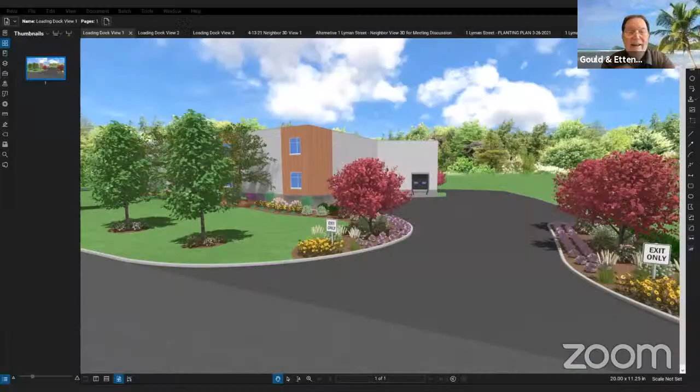I will now confirm members' access, and if you can just say yay when I call out your name. Diana? Yay. Dave? Yay. Lisa? Yay. And Tom? Yay. And my name is Michelle. I'm the chair. So we will begin the meeting, and we'll start by inviting in the applicant, and today's meeting is only about one item. So we start with, we have Jeff, Alok, Vito. And will Marshall be joining you? Here I am. Oh, and there you are, Marshall. Yep. Okay. So at the last meeting, we had 2 items to discuss.

I'm recusing myself from the board. Okay, yeah, please make a note that Dave is recusing himself from the board and will be joining the team to discuss the landscaping. So what we're going to do is start with the loading dock because we had several questions about that. Let's start talking about that, and then we can segue over to the final discussion on the landscaping. And then unless noted otherwise, we should be able to wrap this up. Okay. Who wants to talk? Is it Vito or Alok or Marshall or Jeff? Want to start with the loading dock?

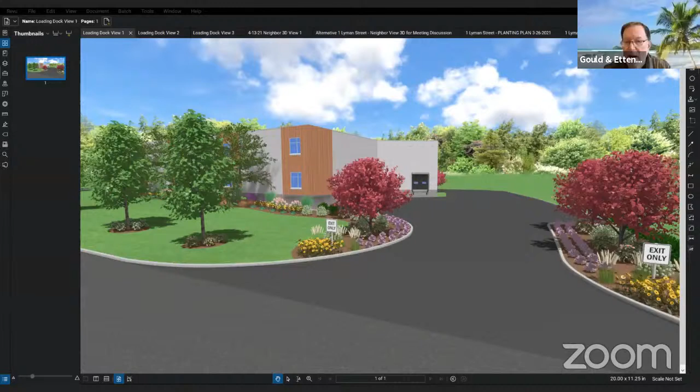Alok, are you going to do this? You're muted. I think he's frozen. I'm trying to unmute. I seem to be having some little difficulties here. Can you hear me? Yes. Yep.

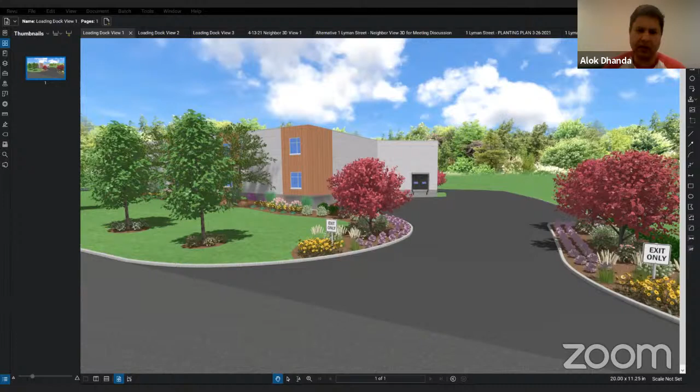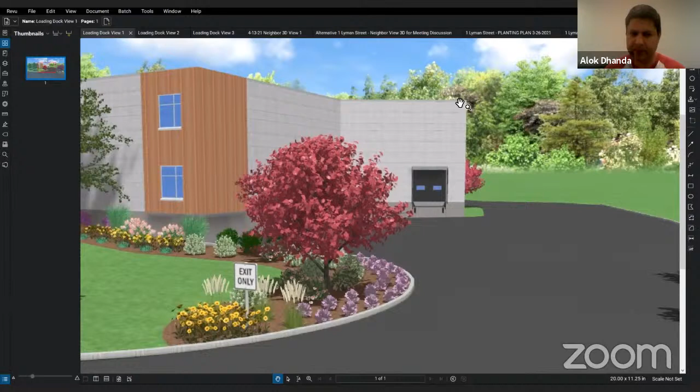It seems like this is really the only facade along which the foundation will be visible. We have plantings along virtually the entire perimeter along the 2 sides and the front. And so this at the back of the building is where we would experience the foundation. I noticed this plenty in institutional buildings and residential buildings, and it seems overkill to clad it in my opinion, but that's kind of where the rendering stands from an architectural standpoint. Okay.

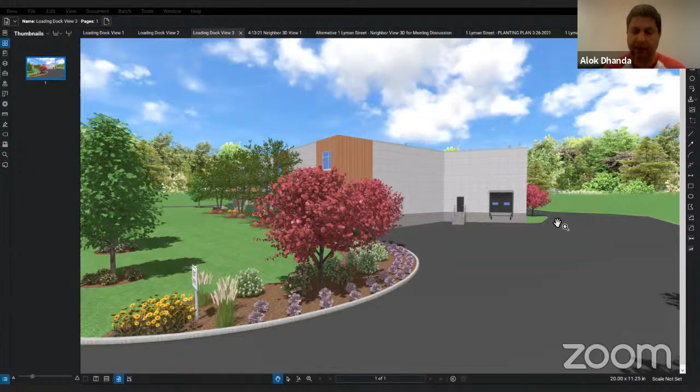My only comment would be maybe consider having the doors be the same color as the split face block or close approximation so it doesn't pop out at you. But it's relatively modest in its scale compared to the rest of the building. Yeah, I would agree. I don't think we'd have any issue with blending the doors. I think that's certainly doable. I agree the color change makes sense. I do too. That's a good comment, Tom.

So I find that perfectly acceptable. It's such a modest detail on the scale of the building. It's not intrusive. It's actually kind of minimal compared to the rest of the buildings in the industrial district, and it's certainly residential in scale and type. So I'd rather focus on the landscaping.

Okay. And do any other board members have any other comments about this rendering? How about you, Lisa? Any comments? Are you in favor of it? Yeah, I think the door comment is correct. I would definitely put the garage door to blend with the wall and the man door. Yep. Okay. Nice job. Looks good.

Okay, so thank you on this. This takes care of the loading dock area. If you can make that change, it's appropriate. If we're all set with this area of the building, let's go over to landscape and start discussing the landscape, which is the final outstanding issue.

Now, I don't know if you want to do this, Marshall or Jeff, but Jeff, you had either a call or a discussion with the abutting neighbor Ann, and then Marshall, yourself as well. And just to let the committee know that Ann was delayed in getting back because she had a family member that is very ill that she's been taking care of, but she was able to respond, which I think Marshall and Jeff can walk you through because basically they've been working with Ann on this.

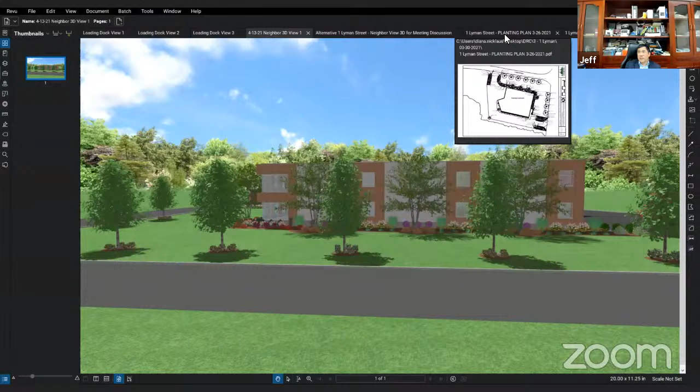Let me start with my conversation with Ann. So basically, I sent a few emails to Ann. The first email basically asked her to set up a meeting with me or David to discuss their landscape needs. And she did not respond to my first email, but then I followed up with a second email. Then she did respond to the second email, and her words indicate that she preferred to have more trees, more greens around Lyman Street.

And then I also sent the third email asking her if her family can consider letting us plant some trees on her property according to a design acceptable to both parties. And she respectfully declined the offer. And so that's all the communications I have with Ann. Okay. And Marshall, did you want to give feedback?

I also sent Ann an email saying, obviously, sorry about her family situation, because my wife and I have been through that within the last year as well. But I did not hear back from Ann in the sense of we had offered to meet, and we had offered if she would prefer to have some plantings at her property. And there was no response saying, okay, let's meet.

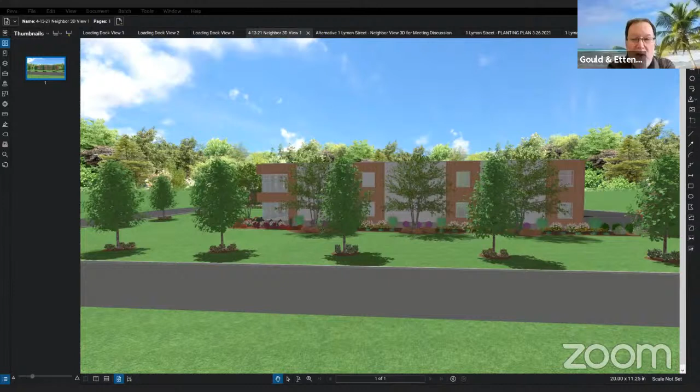So we're here saying, we think this design looks nice. We think your committee feels it looks nice. They seem to want the maximum amount of trees to block any view of the building, and certainly the loading dock. So I leave it up to the committee for a recommendation. I know that they'll be talking to the planning board as well. And they have sent some emails to the planning board, and Kerry sent back an email saying that your vote is a recommendation and that the planning board makes the final decision. We are comfortable with any of the plans that we have shown you.

Thank you. So we can discuss this as a committee. My recommendation to help the committee in making a decision is, possibly as the board sent a notice back to the committee, and I'm on the planning board, you might want to send two renderings and let the planning board make the final decision.

So, you know, the direct abutter across the street has asked for more trees than what we're seeing now. Have you guys been able to show this one and then the one with more trees? And do we want to have a discussion about that? And is that what our message would be back to the planning board, which would be, you know, here are two options, and the planning board could consider one or the other.

This board, I think, preferred not to flood the area with trees, and a good point was made that the more trees you have, the less the grass will flourish. But we're open to either style.

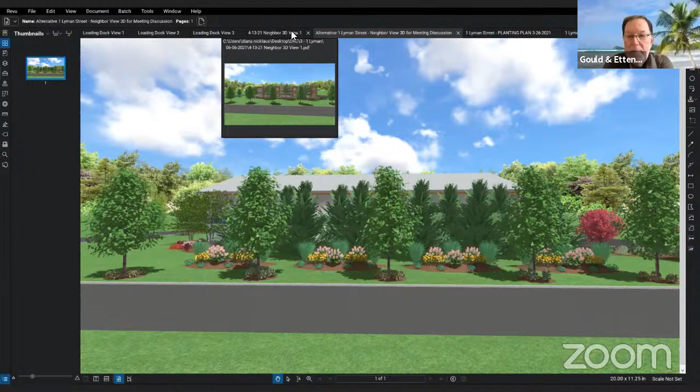Okay. So does the committee have any feedback, any response to what they're seeing now and the correspondence that's happened between the applicant and the direct abutter and her concerns? Tom? I have a comment or two.

So Dave, this is the north elevation of the building. Is Dave? Yep, here we go. Sorry, I was on mute. This is the north elevation? This is the one along Lyman Street. This is the original one we did. We didn't change the building on this. This is the original one. So this is Lyman Street, yeah.

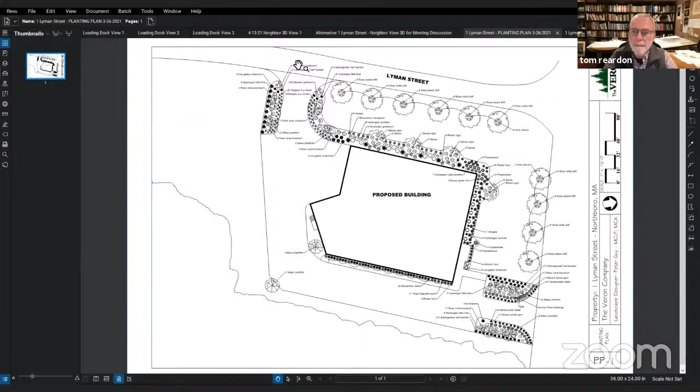So what's the orientation? It's facing north, correct? Yes. Okay. So this side yard has the most shade of all four orientations. Sorry, it'd be west. Northwest? Oh, north is on that side of the page. Okay, so we've got northwest. So we get low sun, or a lot of this will be in shade. The building shades it, so the plantings closest to the building will be predominantly in shade on the backside, because of the movement of the sun.

So my feeling is this image of the planting would be most successful with the site conditions in terms of the amount of sunlight available, and it allows air circulation so things don't get damp and mossy. When you overplant, you really can't appreciate the landscaping, especially the forms or the colors, because it's so dense. And I think a really densely populated side yard here will be a real maintenance problem, and it would be difficult to keep the species vital and vibrant.

So I think overplanting in order to create a buffer is deficient in two ways. It blocks an attractive building, and it doesn't give the plantings that you do provide sufficient space and air and light to thrive. So I would strongly urge the committee to go with the first rendering and avoid what I would consider overplanting.

I would just add to what you said, Tom. I still feel that the landscape should work with the building design and complement the building design. And I don't feel that this one complements the building design in the way that the latter plan does. The applicant has worked hard to make the changes to the building that we recommended, and I appreciate that this landscape option works with that. And I agree with Tom's point about the sun orientation as well.

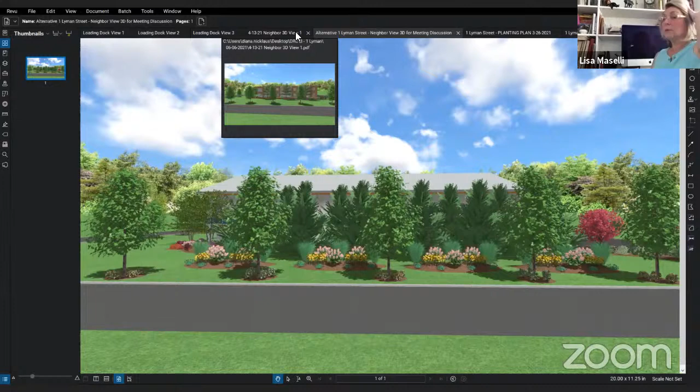I just want to know, are we putting in a perpetuity line, because larger trees do have a harder time taking root? So I would like to see that. That is up to the planning board, and they've been doing that all along. I think Bob Frederico's on, so Bob can weigh in on this. They've been making it a condition of most applications. Bob? Most applications or decisions have something in perpetuity, whether it be trees or fences or special conditions.

I think it's a little groggy this morning.

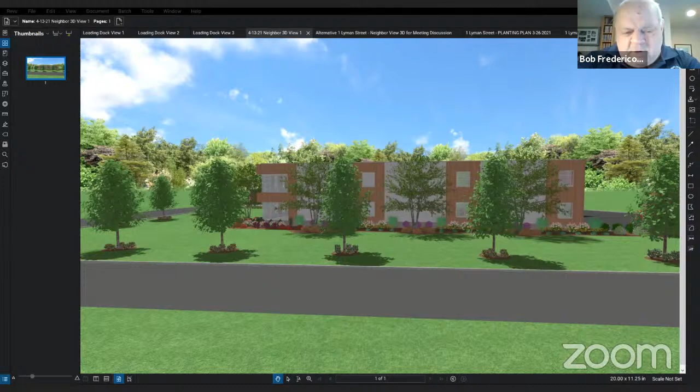I think the general zoning bylaws have something that any kind of a special permit or variance with conditions, those conditions are in perpetuity. It's kind of a blanket statement. I'd have to research that, but back to the original question, most of the boards usually put in perpetuity into it anyway. Yep, thank you.

Okay, so I would just like to have it sent over to the planning board to write that, because I know that I have the problem with the bank next door to me that the perpetuity isn't being listened to, and that looks pretty bad after 10 years. And when you go back and look at the minutes, it's not in the minutes, so.

That's an odd phrase to say, in perpetuity. That's a pretty long time. And our climate has shifted one whole zone. And a lot of the species we use now may struggle as our climate continues to change. So I think there should be some awareness of the climatic changes and how they're going to impact our landscaping. And, in perpetuity, we may be underwater. So. Well, I don't agree with that.

It's an odd phrase. Yeah. So I think what the board can have a discussion on moving forward, I'm not talking about this committee because it's not under the purview of this committee, unless the board asks for advisement. But I think what the planning board means when they talk about in perpetuity is if there were 5 trees and 1 died, then the applicant would replace that tree. And if for some reason that species is not doing well, then the applicant can go and find another tree that will sustain or do just as well in that location.

So I think that's what we're talking about when we work with applicants. If 5 trees are planted and 1 is not doing well, then the applicant will go back and replace the one that's just not thriving and maintain it. So good points. And we've been having discussions with this on the planning board. I want to applaud the applicant for investing in these trees at the size they are at the mature growth, because that is going to be really helpful.

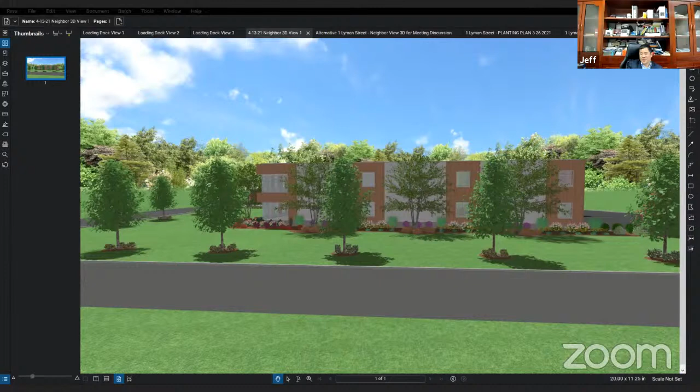Hi, Michelle. I have a question regarding the height of the dock. I'm sorry, I brought that back. Okay. So I probably missed the detail. Actually, the height of a high cube container itself is 9 feet and 6 inches. And so by doing the dock at the height of 9 feet, we would not be able to pull the pallets out of the container.

And I believe my dock probably has the height of the door. I have not measured, but I would say at least 12 feet tall, so that we can jack up the pallet and pull them out of the container. We always ship the pallets in the container every 3 months, and so that's crucial to have the dock for unloading the pallets every 3 months.

So I would put that request in to raise the height of the dock door to 12 feet, which can reasonably match what the business needs to unload the container once in a while.

Alok, do you have a comment on that, if you're still there? I am here, and I do not. I looked for a loading dock door that would work with a tractor trailer. There are different sizes, and I went with one size that seemed to work. But to Jeff's point, if that's what he needs with the tractor trailers, and to be able to get a lifted pallet in, then I can modify this dock door to be 2 feet taller than what's shown.

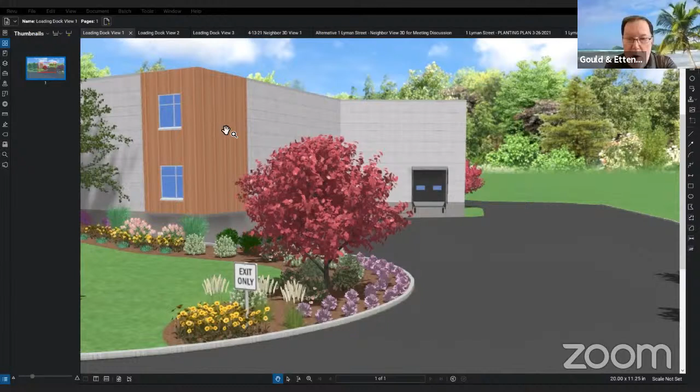I think it's approximately a 9 by 10 now. So if I would raise it up by 2 feet, I can stretch the model and resubmit it. And I can also change the color on it to blend. And between those two things, hopefully it won't change the overall essence of this image all that much. For my clarification, are you suggesting that it be 3 feet off the ground and then a 9 foot 6 inch door? Or are you suggesting the door itself be 12 feet high?

The container sits on the trailer. Okay, that trailer height by default is about 3 feet. So that's when the trailer backs up to the dock. So the bottom of the container reaches the dock, the beginning of the dock, and so the height from the bottom of the dock to the top of the dock needs to be approximately 11 to 12 feet.

The height of the high cube container itself is 9 feet and 6 inches. That's a standard height, and so we definitely need to jack up the pallets in order to pull them out, right? So yeah, they will need some room to accommodate the height of the container, and I would say 11 feet is enough. Okay, 11 feet from the beginning of the dock.

Yeah. Right. The way it's shown now, it's got a little dock leveler on there. We're about 3 feet. I don't know exactly what the grade is at that point. We're approximately 3 feet above grade. Yep. And that door is somewhere around 9'6". When I pulled it off the model, I think it's 9'6", or maybe with everything that's shown there, maybe 10 feet off the floor. So if we had to raise it by a foot or two, I don't think it would substantially impact the visual that you're seeing.

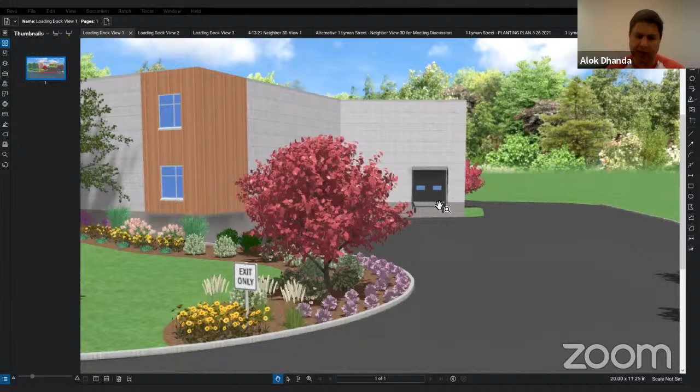But I can do that today or tomorrow and get it back in circulation for record, and I'll change the color to match the CMU block as well. Yeah. So if you go 18 courses of 8-inch block, that'll give you a 12-foot high opening, and that's a standard size for a door. So I'd rather see you match the coursing of the material than try to have half blocks. So yeah. I agree.

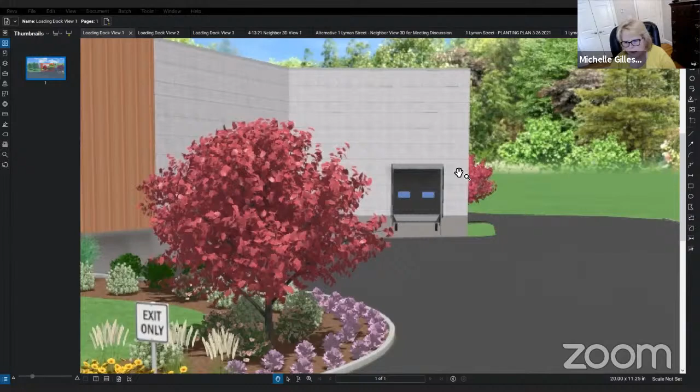And we don't want to put a door there that you can't use. That doesn't make sense at all. So let's go with Tom's recommendation, because it's going to aesthetically look better if we go up to 12 feet. And just by matching the color, I think visually from the street, you probably won't notice it significantly. So thank you for picking that up, Jeff. I'm glad you picked it up. And your engineer will make that change. And we should be good on this.

Is everyone okay on the committee? Lisa, Tom, and Diana with this 12-foot? Okay. Yes, that's fine. Thank you. So you're back to the planning board in a couple of weeks. Thank you so much for all your work. It's a very attractive building. And thank you for working with us.

Thank you, appreciate it, Michelle. Thank you. Thank you, team.

Thank you. If I could, Michelle, I've obviously represented a lot of developers for projects in Northborough. And this is, I have to say, the most rewarding and productive session that we've worked with. I'm obviously not an architect, and when I first saw the building, I thought, oh, that's an attractive building. When I look at the original slides and I look at what we have ended up with, it is so much improved. So this was a wonderful collaborative effort.

I want to thank everybody on the committee, as well as both our engineer and our architect and landscape designer. I think this was a wonderful outcome. I think it looks terrific. Yeah, we have two great architects on our committee, Diana and Tom, and working with Alok, I think they produced a really very attractive building.

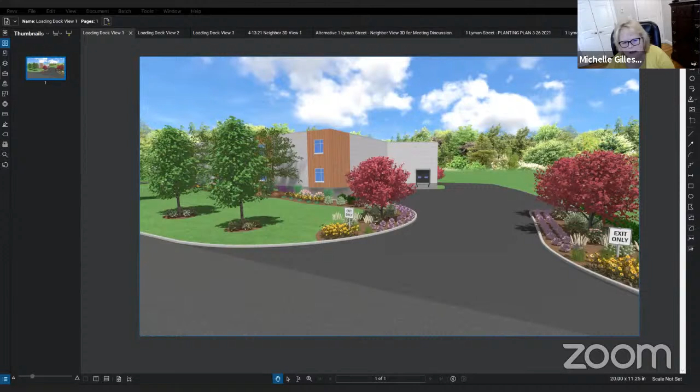We're very fortunate to have Dave on as a landscape architect on our committee. I know he recused himself from participating in the decision, but he produced a very nice product. Thank you, all three of you, for that.